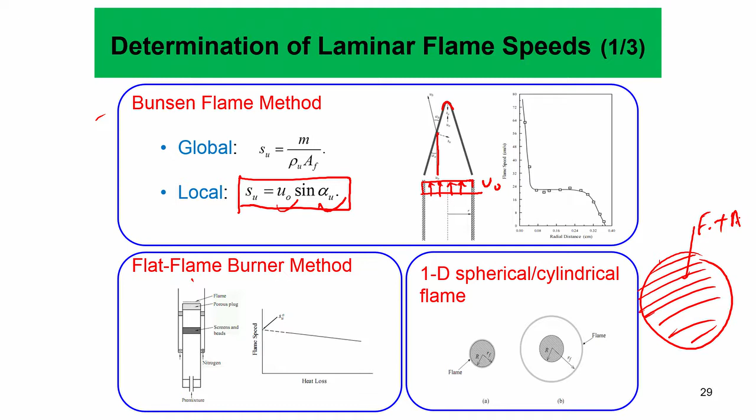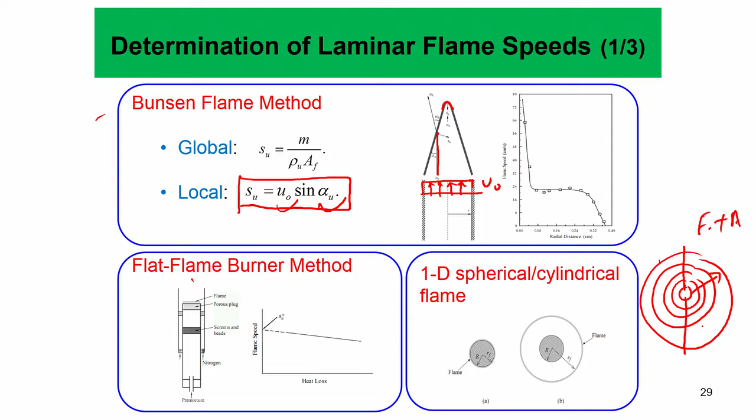But this is interesting, this 1D spherical and cylindrical flame. Basically you fill a spherical vessel with a fuel-air mixture and ignite it at the center with a pair of electrodes, and this flame essentially grows like this. So with time it grows, and by estimating the radius one can find radius versus time, then differentiating with respect to time to find dRf/dt, one can find the local flame speed.

The indirect way is to estimate the pressure rise in the chamber and relate it to the propagation which generates the hot product causing the pressure rise. But better is to directly image the flame front with a high speed camera, measure the quantity in the downstream value, and then convert.

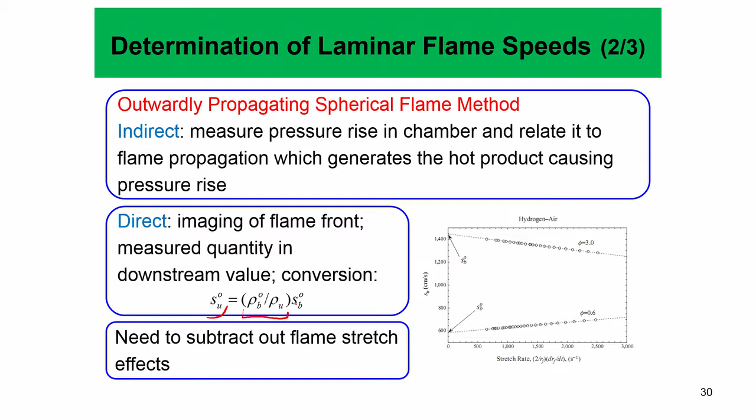So SU0 is essentially rhoB0 times... rhoB0 is the adiabatic burned gas density divided by rhoU0 times SB0. You can show that SB0 is essentially equal to dRf/dt, but of course there is a flame stretch which we will discuss later - the surface of the flame is not planar, it is stretched because of curvature effects. Using that, we need to subtract the flame stretch to arrive at the planar laminar flame speed, which is basically the signature value for the given fuel-air mixture at a given upstream temperature and pressure.

So here also another method is the stagnation flame method, where the flame is also stretched. In the stagnation flame method, you have two jets of fuel-air mixture impinging on each other. This jet comes like this and this jet comes like this, and they impinge on a stagnation plane, with the flame formed just upstream and downstream of the stagnation plane respectively, as you see here. Because of the divergence of the jet there is a stretch, the flame is stretched, and we have to subtract the flame stretch out to get the planar laminar flame speed, which is the parameter of choice.

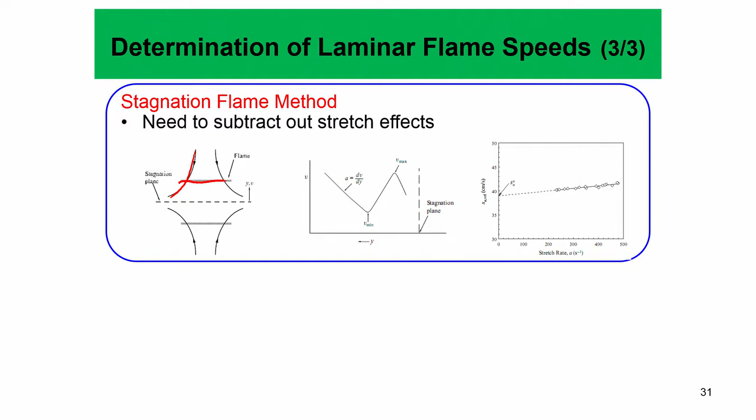Actually the planar laminar flame speed, since it involves both transport and reactions, is a very good choice for validating detailed reaction mechanisms. That is also one of the reasons why people have spent a lot of effort estimating the flame speed by different methods with different orders of accuracy, trying to improve these methods over time.

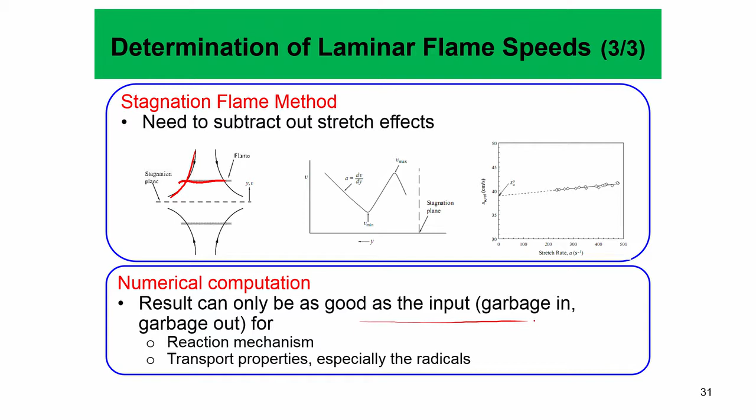Nowadays people either use the spherical flame method or the stagnation flame method, the counterflow flames, to estimate the planar laminar flame speed. As I was saying, the results are used for validating reaction mechanisms and transport properties, especially for the radicals.

So now the next question is: if flame speed is really such an important quantity, which characterizes the flame - both the propagation behavior of the flame, and this comes out because of a certain unique structure of the flame, the unique structure of the diffusion region and the reaction region - then what does this really depend on?

And of course it's a practical interest, because you fill up a tube with a premixed fuel-air mixture and ignite at the end. The flame will propagate from one end to another, and it's of practical interest to know what that speed would be, because as we discussed previously, in a premixed gas turbine combustor, locally the flame will be stabilized only at that point where the local flame speed equals the local normal flow velocity. So in designing combustors, if you are designing a premixed combustor, one must have clear knowledge of the flame speed of the mixture, otherwise you cannot stabilize the flame.

Flame speed is really important, and we need to understand what the flame speed depends on. If you remember, the flame speed we discussed was obtained from the Zeldovich-Frank-Kamenetskii analysis, giving f0 squared equal to lambda by Cp times Bc times Lewis number times e to the power of minus Ta tilde by Tb tilde. This was your minus activation temperature by the burnt gas temperature, equal to the minus Arrhenius number divided by the Zeldovich number squared.

Now the Zeldovich number, if you remember, involves Ta tilde. If you write it in tilde terms, that is Tb0 squared tilde, and this is Tb tilde minus Tu tilde, which equals 1. Now if we consider Ta tilde as constant, the Zeldovich number is essentially inversely proportional to Tb0 squared. So you can write f0 squared as proportional to Tb0 tilde to the power of 4, because of the Zeldovich number squared, keeping the activation temperature constant, times Ta tilde by Tb0 tilde.

This fact, that the burning flux has a very strong dependence on temperature, shows up in experiments and simulations too, which tells us that we expect the burning flux to have a strong temperature, or adiabatic flame temperature, or burnt gas flame temperature dependence. And yes, we find in experiments that the burning flux, or the laminar flame speed, to the leading order, is actually governed most strongly by the adiabatic flame temperature.

This is a testimony to that fact: if we plot laminar flame speed on the y-axis and the equivalence ratio on the x-axis for a methane-air mixture, and adiabatic flame temperature on the other y-axis, you see that the flame speed plot mimics almost the adiabatic flame temperature. Of course it can shift slightly left or right, because it also has dependence through the Lewis number, etc., which has an important effect.

So consider all these alkanes, from methane, ethane, propane, to butane, pentane, hexane and heptane. You see that the laminar flame speed of methane is smallest at a given equivalence ratio, then it increases somewhat for ethane, and slightly more for propane. Then you see that all the laminar flame speeds of butane, pentane, hexane, and heptane are all the same. Why is that the reason? The reason is actually the adiabatic flame temperature.

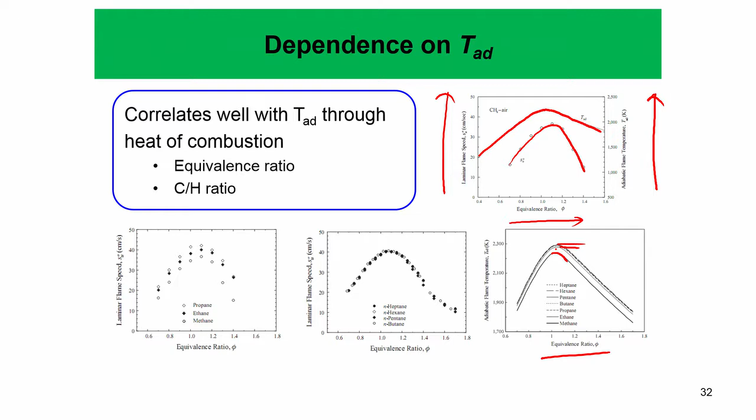If you plot adiabatic flame temperature, you see that methane has the lowest adiabatic flame temperature, which is correct, but then ethane increases slightly, and this adiabatic flame temperature does not increase at all from propane, butane, pentane, hexane, to heptane at a given equivalence ratio - it changes very little. So the flame speed, because it depends to the leading order on adiabatic flame temperature, also does not change at all between butane and heptane. This is called the fuel similarity: from butane to n-heptane, the flame speed does not change, and the reason is purely that the adiabatic flame temperature also does not change.

Okay, and what happens with hydrogen? With hydrogen, it is a little bit tricky, but the behavior holds more or less. You see here, if you plot the laminar flame speed on the y1 axis, and the adiabatic flame temperature on the y2 axis, as a function of equivalence ratio. So yes, it changes, it has a bearing to that. But this Frank-Kamenetsky analysis also says that F0 squared will be proportional to the Lewis number.

This effect is really exaggerated for hydrogen, because hydrogen is a very small molecule, so its diffusivity is very large. On the lean side this Lewis number is very small, its molecular diffusivity is large, and on the richer side, the effective Lewis number is obtained by that of oxygen, so this Lewis number is 2.3. Because of this strong change in Lewis number, F0 squared shows a little bit deviated behavior from the adiabatic flame temperature. These effects are most significant for stretched flames - this shifting of the flame speed will have a strong impact on the stretch rates, controlled by this Lewis number, which we will see later.

For now we will just focus on the planar laminar flame speed, because that is why we have this F0. So the planar laminar flame speed, once again you will see the dependence on the molecular structure - how does it depend on the molecules? So we see that if you plot like from C2H6, that is ethane, to ethylene, to acetylene...

You see it increases at 1 atmosphere, but is it increasing due to the adiabatic flame temperature? Because your acetylene adiabatic flame temperature is large. So what we can do is choose the oxidizers in such a way, or dilute the oxygen with an inert, so that the adiabatic flame temperature is constant across different cases, and then we also see that acetylene wins over ethylene and ethane. So it is acetylene despite that. So here the fuel structure also has some effect on the flame speed, and that cannot be solely captured by adiabatic flame temperature. So yes, adiabatic flame temperature is very important, but it is not the only factor that controls the flame speed behavior. That is the lesson of this.

One very important thing is the dependence on pressure. Why? Because engines operate at high pressure, both car engines and gas turbine engines. Gas turbine engines operate at pressures of 30 or 40 atmospheres, right? So we need to know - only knowing how the flame behaves at 1 atmosphere is not good enough. We need to know how the flame behaves at 30, 40, or 50 atmospheres.

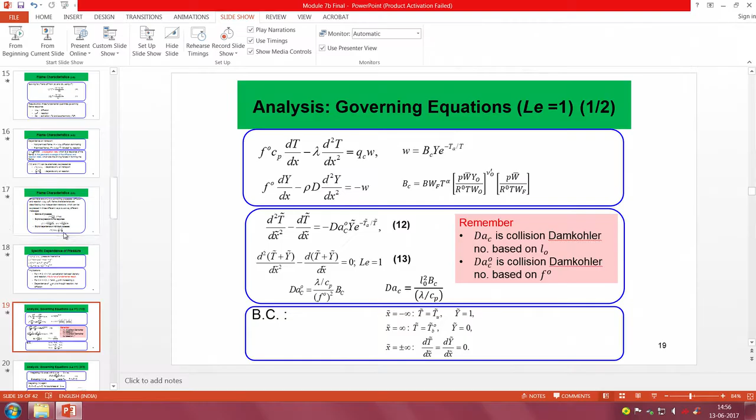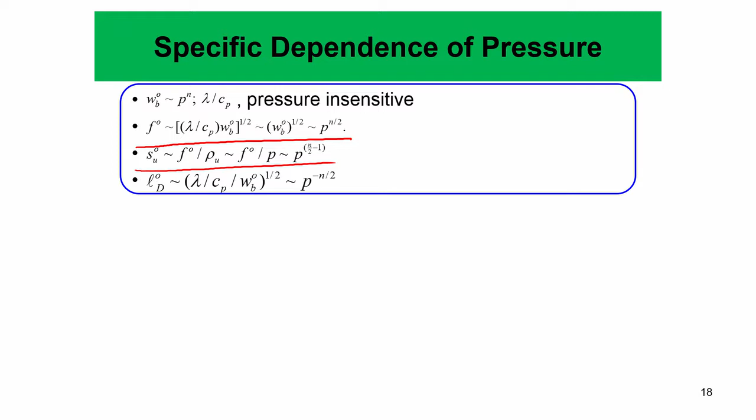So if you remember, we obtained this relationship in previous classes - how should F0 depend on pressure? It was shown that F0 is going to increase with pressure P to the power of n by 2, where n is the order of the reaction, whereas S, which is F0 - the burning flux normalized by density - should behave as P to the power of n by 2 minus 1. So depending on the order of reaction, F0 must always increase with pressure irrespective of the order, because the burning flux must increase with pressure, which comes from the fact that the reaction rate increases at high pressure because collision frequency is higher. But with S, because the density also increases, this is not guaranteed. So depending on the order, S can actually increase or decrease with pressure.

So here we will see what is happening for actual fuels. With pressure, as we have seen, the dependence on the flame speed comes through two things - chemistry and density. The chemistry part is when you say F0, the burning flux is proportional to the reaction rate to the power of half, and then we can correlate the reaction rate with pressure.

But then SU, the flame speed, also contains the density. So the density effect can take away some of the chemistry effects when it comes to dependence on pressure. So we see that, if you consider hydrogen-air flames at different equivalence ratios and at different pressures, S is highest at 1 atmosphere and then reduces with increasing pressure.

So, the flame speed essentially reduces with pressure, and the reason is because the density is actually increasing with pressure. So, as the density increases, you have more gas to heat up, and that is why the flame speed is retarded at high pressure.

So, it is an effect of density, not chemistry. If we really want to understand how the flame speed depends on pressure, the better quantity to look at is the burning flux, F0, which is equal to rho_u times SU0. This quantity accounts for the density-weighted flame speed. So, F0 is a proper parameter because it is only affected by chemistry and not affected by density.

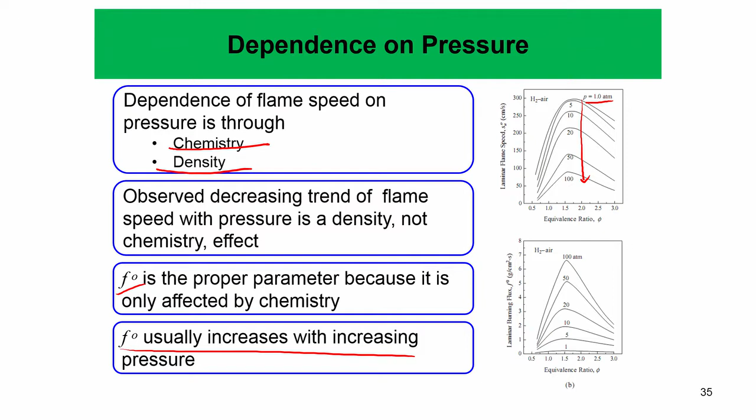So, as we said, F0 usually increases with increasing pressure while flame speed actually decreases with increasing pressure. That is one important thing we have to keep in mind.

Now using that relationship, we can find out the global order of the reaction. We see that for hydrogen air combustion, which involves at least 9 species and 19 or 20 reactions, the whole thing can be simplified into one reaction order using this burning flux and the pressure dependence.

So, if we plot this, we see how for different equivalence ratios the global order depends. It starts from somewhere near 2 for larger equivalence ratio cases, then it drops, and then it can again increase. That is why, because it is mostly less than 2, we have the flame speed decreasing with pressure.

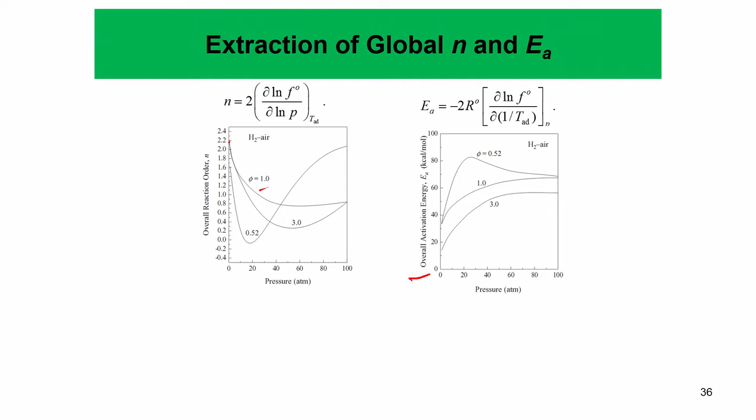We can find out the overall activation energy, also the global activation energy for the whole hydrogen air reaction, using this formula as well.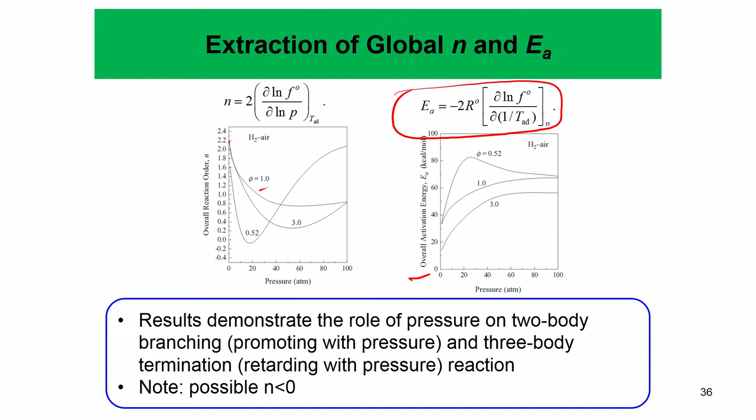But this is a fact based on the burning flux, whereas the actual behavior comes from the fact that reaction rate increases with pressure, which causes the increase in burning flux, whereas the flame speed reduces with pressure, and that is purely an effect of density and not an effect of reactions.

Another parameter that has been left is essentially transport properties. We have talked about adiabatic flame temperature, molecular structure, and pressure, but we have not talked about transport properties.

As you see, F0 squared is proportional to lambda by Cp when all other parameters are constant. So, how transport properties affect the flame speed can be easily found out by experiments where nitrogen can be replaced with argon, because they have similar molecular weights and diffusivities but different Cp, so the adiabatic flame temperature is actually changed.

So, we can manipulate flame speed using this property, with different inert substitution. As you see, because the Cp values are changing with different inerts, though their diffusivities are similar, at least for nitrogen and argon.

With nitrogen and argon, as the Cp is changing, the flame speed is actually increasing with argon air, and it increases further with helium air, because if the Cp is less, you have less energy to be spent heating that gas up. So, the flame speed is essentially higher in these cases.